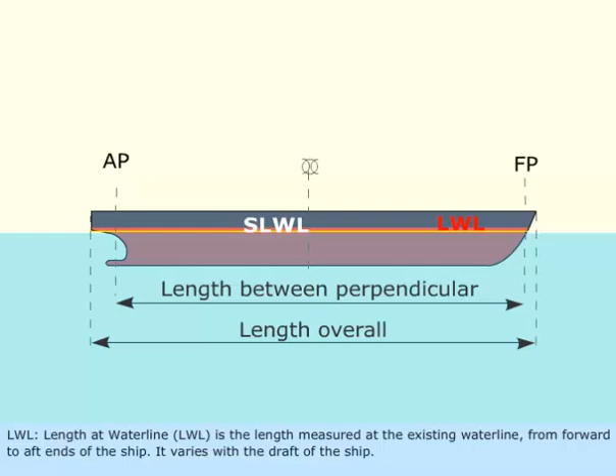LWL, length at waterline, is the length measured at the existing waterline, from forward to aft ends of the ship. It varies with the draft of the ship.

LBP, length between perpendiculars, is the length measured between the FP and the AP of the ship. It is often used in stability calculations.

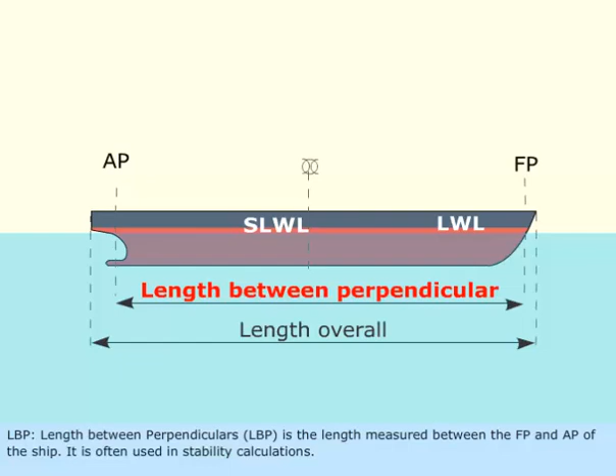SLWL, summer load waterline, is the waterline at which the ship is floating at even keel up to the summer load line in salt water of RD 35 cubic feet per ton, or 64 pounds per cubic feet.

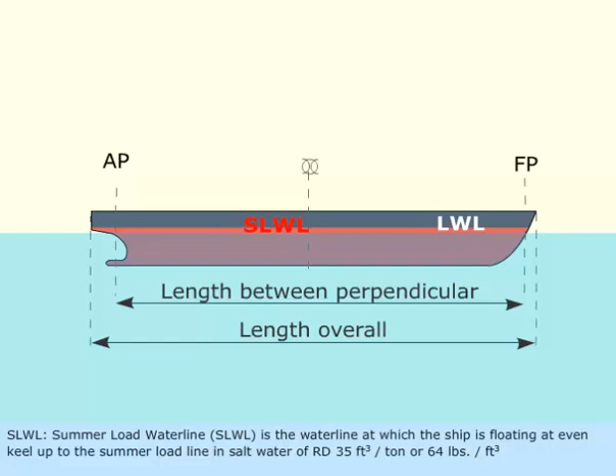FP, forward perpendicular, is a vertical line passing through the intersection of the SLWL and the foreside of the stem of the ship.

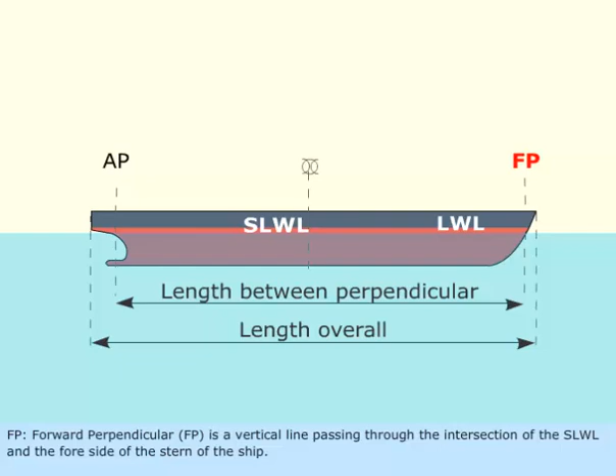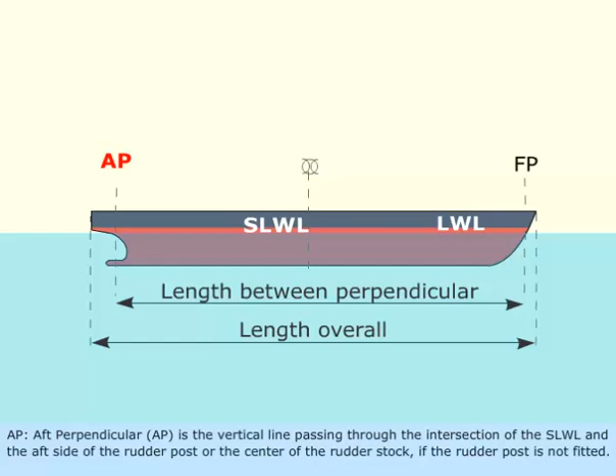AP, aft perpendicular, is the vertical line passing through the intersection of the SLWL and the aft side of the rudder post, or the center of the rudder stock if the rudder post is not fitted.

Midship, or amidships, is the vertical line passing through the midpoint of the LBP.

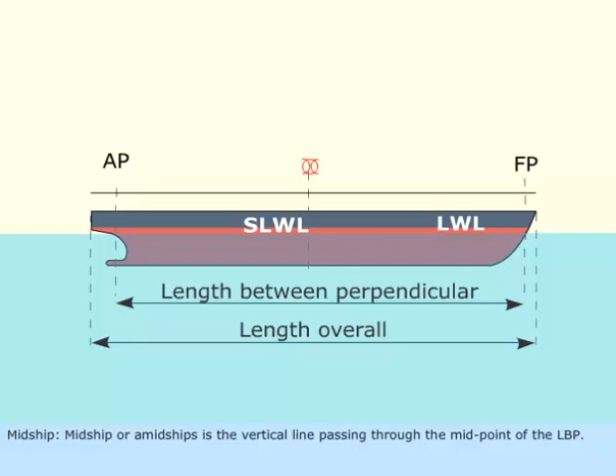Breadth: Extreme breadth is the maximum breadth measured between the outside of the ship's sides. Molded breadth is the maximum breadth measured at midship between the inner sides of shipside plating.

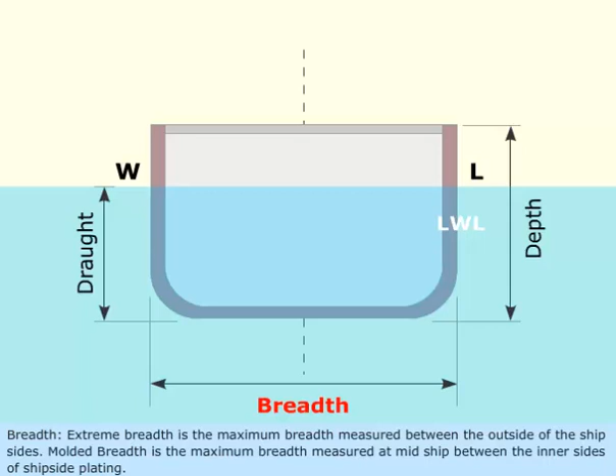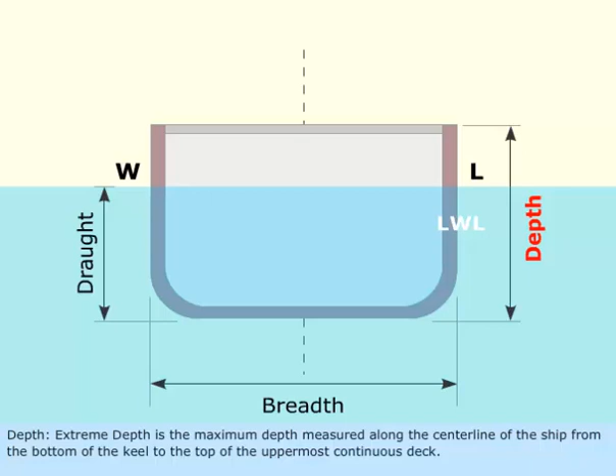Depth: Extreme depth is the maximum depth measured along the center line of the ship from the bottom of the keel to the top of the uppermost continuous deck.

Molded depth is the vertical distance measured along the ship's sides from the top of the keel to the underside of the uppermost continuous deck.

Draft is the vertical distance measured along the ship's side from the bottom of the keel to the waterline.

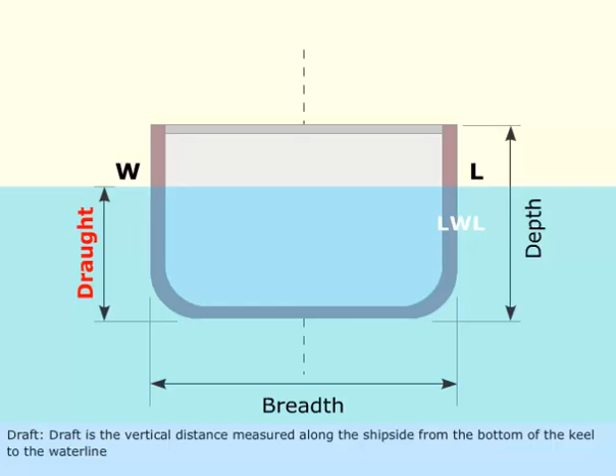Molded draft is the vertical distance measured at amidship along the ship's side from the top of the keel to the upper edge of the summer load line.